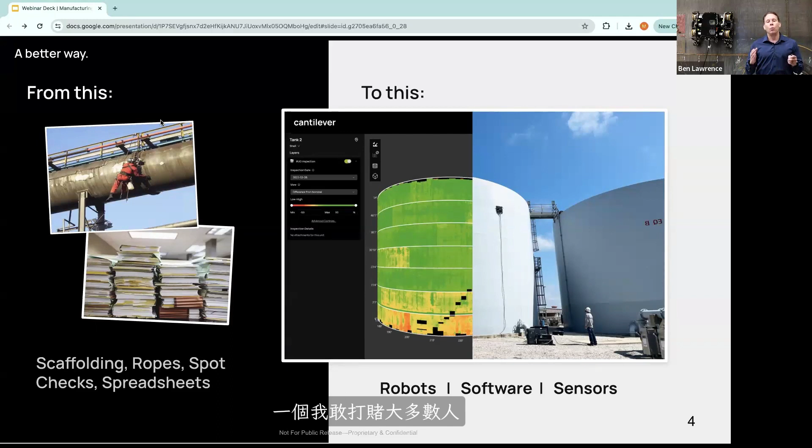All of the ensuing costs associated with ownership, related to inspection and maintenance, they all go down. Bottom line is their estimated savings on just one tank that they put through this new approach equals close to $1 million in savings for their company.

Scale this approach across an entire fleet of tanks or an entire fleet of fixed assets, and we have customers right now who are on track to drive over $100 million in hard dollar savings. Now, this is $100 million that keeps those plants competitive. In some cases, our customers tell us it's the difference between staying in business and going out of business.

Now, I wonder, for your plant, how important would it be to save $100 million? If you're like most of our customers, you're under enormous pressure to reduce costs while still increasing production levels. And I know sometimes that can seem impossible, right? But if you're anything like your industry peers, there is a path that makes this mission possible.

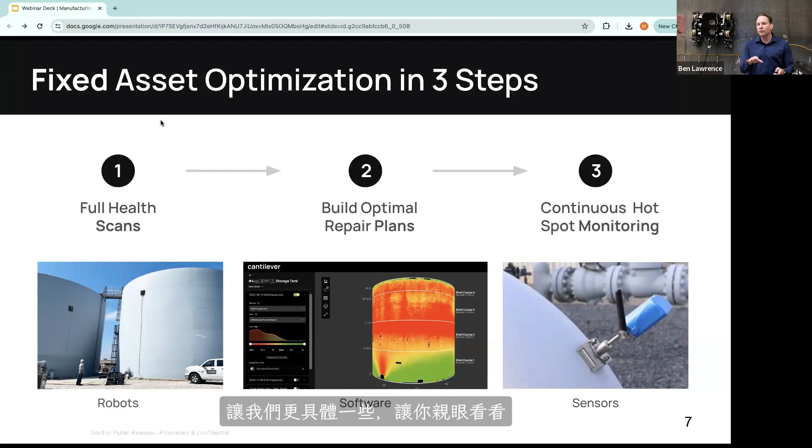So what do each of these three ingredients look like? Well, let's get a little more specific so you can see for yourself. The first of those ingredients is the robots.

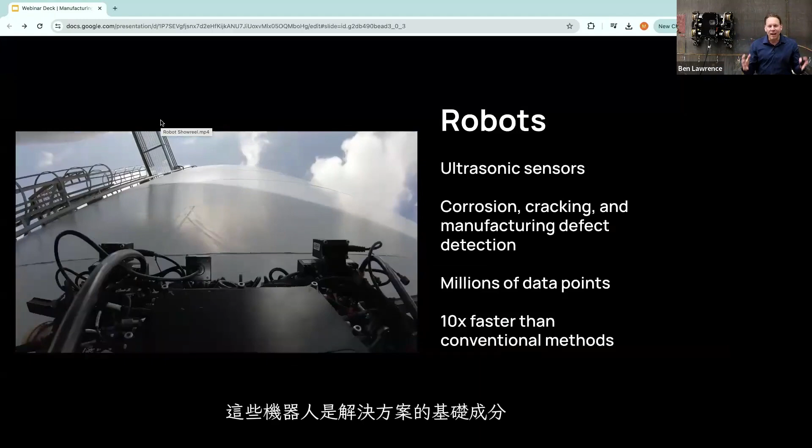These robots are the foundational ingredient for the solution. In fact, it's the first technology that Gecko built, and it's something that we've been making stronger for well over a decade. Now, these crawlers, just like this one, this is one example of the many we have. These crawlers are equipped with all kinds of sensors to detect corrosion, cracking, and manufacturing defects that can be really challenging, if not impossible, to detect through traditional methods alone. So that's the first ingredient.

The second ingredient is the software. Now, the software is a platform we call Cantilever, and Cantilever ingests all of the data from the robots. And in many cases, it will also bring in your historical inspection and maintenance data. And within hours of bringing in the robot data and your historical data, this system will build an optimal repair plan.

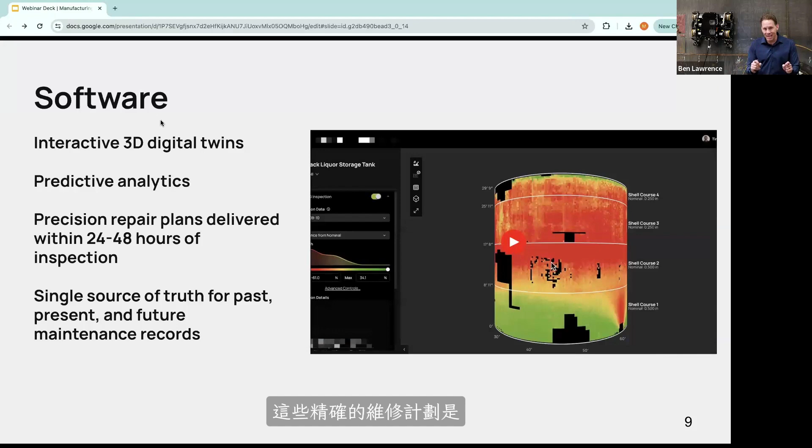Now, that's a key term, an optimal repair plan based on all those data sets. What we're hearing from our customers is if they were to try to build a repair plan that was this comprehensive via their traditional methods, even with their best experts, it would take them weeks or months to build out a repair plan that Cantilever turns around within hours. So huge time savings there. And these precision repair plans are the key to transforming maintenance at these industrial plants.

And that brings us again to the third ingredient, which you may remember are these sensors. Continuous corrosion monitoring sensors, to be exact, that give you accurate readings every day. These sensors are a source of truth that for the first time ever can tell you what process variables are killing your equipment in the first place. For example, if you work in an oil refinery, what mixture ratios or flow rates are driving your process piping to die 5 times faster than it should? Wouldn't that be nice to know? These sensors, combined with the cantilever software platform we just described, drive incredible value.

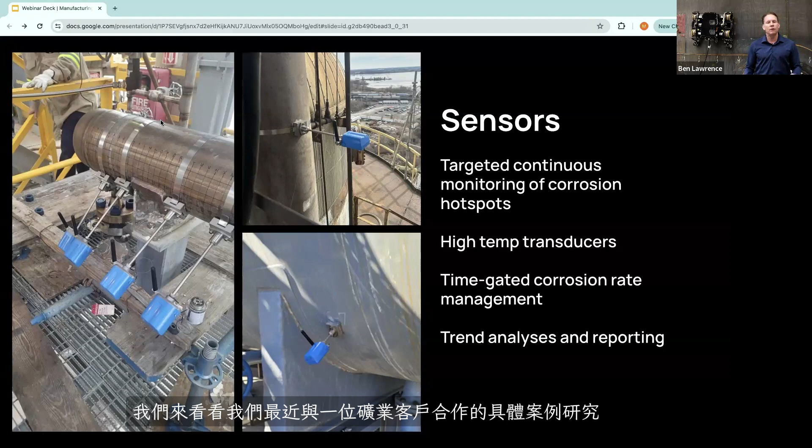Well, what does this look like in real life? How are companies driving value? Well, let's take a look at a specific case study that we just recently went through with one of our customers in the mining industry. In this case, the customer had 2 identical tanks.

These tanks were the same age, came from the same OEM, and drive the same process every day. Based on their traditional inspection and maintenance practices, the customer thought both tanks were in similar condition. But we actually learned that these tanks were completely different, and the customer was blind to a lot of problems that were on the horizon.

Instead, Gecko's solution helped them understand that they had a much more affordable path to install a tank shell liner. The result? First, they avoided a catastrophic failure that almost certainly would have happened before the next planned shutdown. Second, they performed a repair that cost 60% less than they thought they had to spend, and got them just as much useful life on the tank as they would have had anyway.

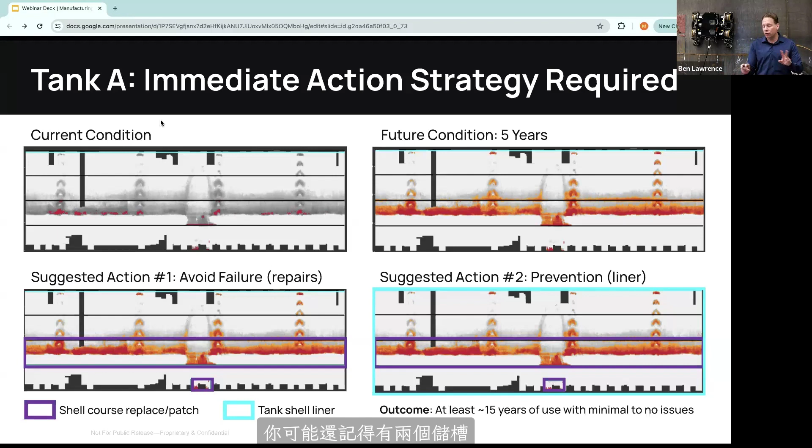Now let's take a look at the second tank. You may remember there were two. On this tank, Gecko's robotic scan combined with our software analytics helped them determine that instead of investing close to $1 million to do major repairs, they could simply adjust the fill height and get the same amount of remaining life. Imagine that, going from $1 million in repairs to zero in repairs.

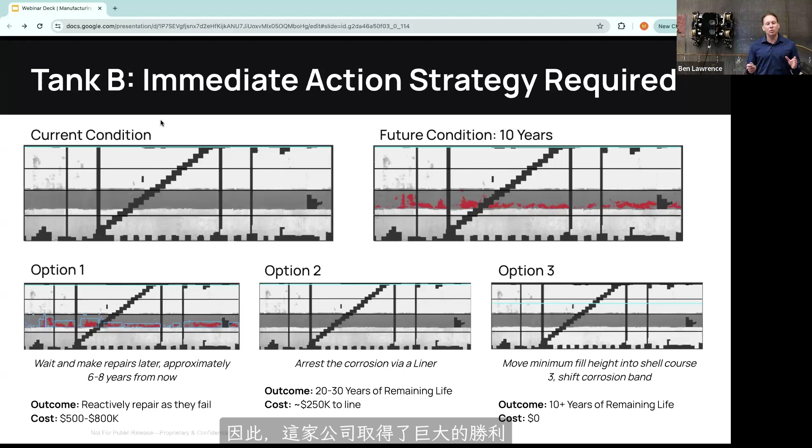That's a game changer. On these two tanks alone, the customer won three battles. First, they avoided the time and headache of draining, cleaning, and scaffolding the tank, since Gecko's robots can do all of that inspection without any scaffolding, and while the tank remains online. Second, they reduced their projected maintenance costs by 50%. And third, they were able to avoid over $1 million of additional CapEx over that period of time. So, a huge win for this company, and that's just on these two tanks.

More to come. Now, you might be asking yourself, where do you begin this type of transformation? We work with you to prioritize a project, and we base it typically on two criteria. The first is the consequence of an asset's failure - what's the implication or cost to you if an asset fails? And the second is your perceived health today of that asset.

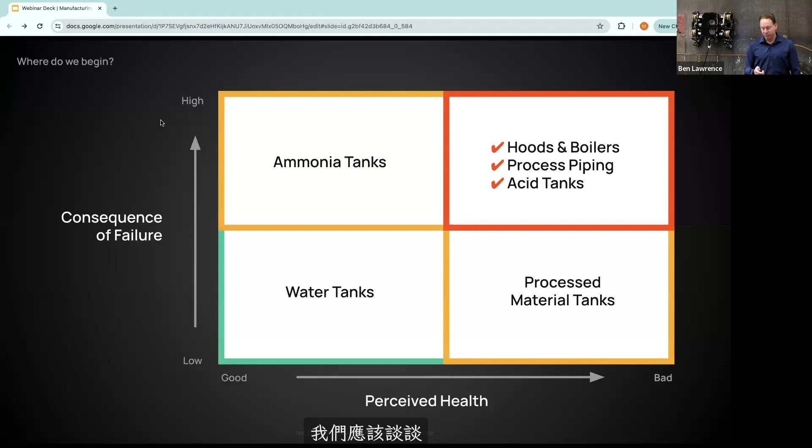All right, moving ahead. So what are the next steps? Well, it's pretty simple. The first step, if you choose to engage with us, is that we'll interview you to conduct a needs analysis to understand what your current approach is to inspection and maintenance, and get your feedback on where you think we should begin.

The second step is that we engage Gecko's subject matter experts - these are industrial pros who are very familiar with the types of projects you're probably facing, and they will visit your plant to make sure your equipment is a good fit. The third step is that we work with you to build a value case that both you and Gecko agree will drive at least a 5 times return on investment.

Now, why a 5 times ROI? Because we don't want to waste your time or ours on a project that does not make you a hero. And what we found is that 5 times ROI is the minimum threshold that makes this a no-brainer for everybody.